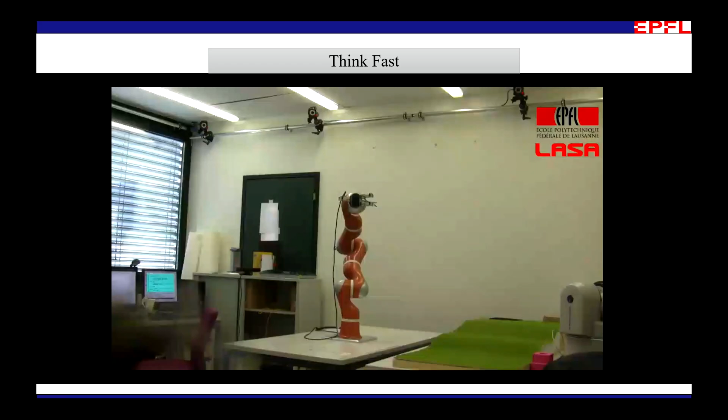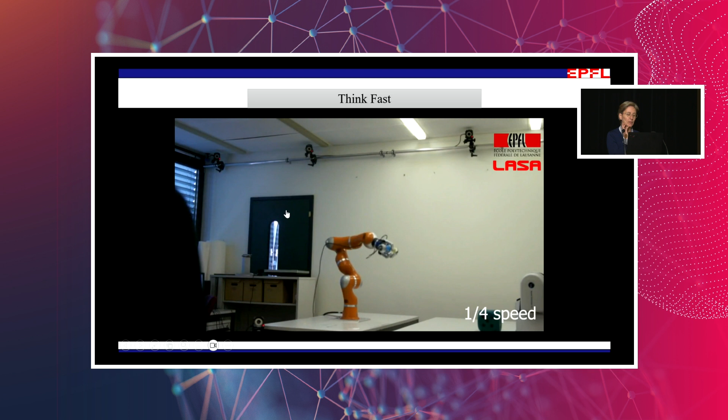I'll start first with the title of the talk. For quite some time, some of you may be aware of the work we did in my lab to demonstrate how robots can go beyond humans and move super quickly, computing things extremely rapidly, such as being able to catch objects flying. This required machine learning, because when you want to catch an object like this one, which is half filled with liquid, it's extremely difficult to predict how the liquid will move when you're throwing the bottle through the air. There is no exact mathematical model for this.

So this is how we bridge machine learning with control, observing that when you have an object flying with a highly nonlinear trajectory, you need to estimate the object's flight, and data-driven methods are ideal for this. But when it comes to actually catching the object, you cannot just go with machine learning. You need guarantees that you will converge to the point and that you will be stable, meaning asymptotically you will get there. And you need to do that extremely rapidly.

So it cannot be done with tons of data, or with a very large model. Preferably, you want something analytical or closed form, so you can compute it in real time in milliseconds. This is a combination between machine learning for modeling the highly nonlinear dynamics and control methods for convergence and stability, which allows you to react once you have convergence and stability. If you have inaccuracy in your prediction, you re-estimate it online, and then restabilize by placing the origin on the system.

Now I'd like to mention, and this is really meant for the junior researcher, that if you take just machine learning out of the box—support vector machine, neural networks, any support vector regression model—it will not do the job. Why? Because those models will drift.

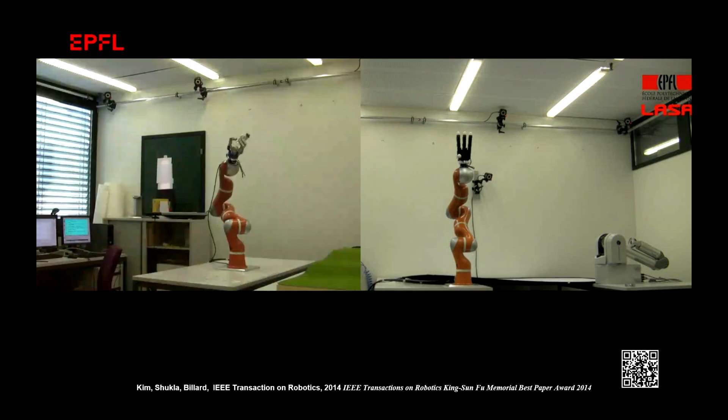And we showed multiple examples of how this could be done to catch a variety of systems with quite good accuracy. We also show that you can couple those dynamical systems easily, in such a way that you can have two robotic arms jointly reaching for an object, which is very difficult to predict. That's another example that we picked.

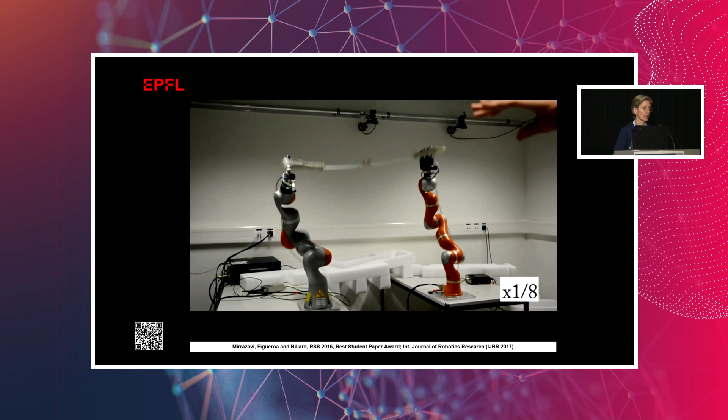When you throw a flexible bar like this, again, you cannot have an explicit model of how the bar is going to fly. So what matters is that you ensure your system can adapt to the flying motion.

We also looked at multi-attractor systems, so not just converging at one attractor point, but being able to move around an attracting point. And we started with the observation that if you wanted to have two dynamical systems with two different attractors, then you will have to partition the space.

And going back to machine learning, support vector machine is a nice way to partition space. If you are familiar with this, it's an automatic partitioning of the space into two classes. But this is also implicitly a way of learning a Lyapunov function, because by construction, your partition is defined by a function which is equal to zero.

On the left-hand side, the function is negative. So this is a Lyapunov function.

But the traditional support vector machine will not guarantee that your Lyapunov function vanishes at the point where you would like it to vanish. So this was a second contribution that we did at the time: to take the support vector machine framework, take the classical one where you make sure the points on both sides are classified, and then add other constraints that force the system to follow the dynamics and stabilize at the attractor, and eventually show that this was still a convex optimization that you could solve.

So another example of combining machine learning with theoretical guarantees.

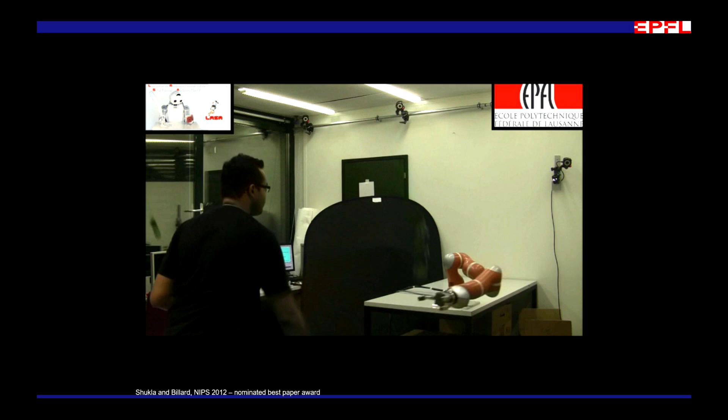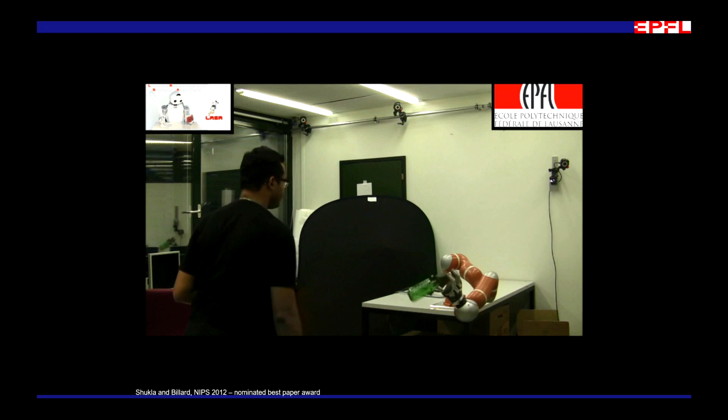And we showed an example of doing this for catching an object in flight, like this, where there are two attractors. They live in joint space. When you want to catch the bottle at the rim or at the neck, you have to close the joints in different locations. So those are two different attractors in joint space, and you can do that in milliseconds.

These were supervised learning problems with an exact partitioning of the space. I went super fast on this because I'd like to spend a little more time presenting another type of work that we've just done recently, which I'm fairly excited about. It's still relatively theoretical, but I hope you will allow me to discuss this for a second.

Machine learning is often used for supervised learning problems primarily these days, but I think we are overlooking unsupervised problems, and these form the majority of the problems that we really face today. In dynamical systems, there are tons of examples of unsupervised problems.

In fact, there are points in space that are really almost collocated, infinitely close to one another, but if you slightly move to the right-hand side, then you will converge to a different attractor. This is extremely important to detect those different variations, because this also means that if you want to characterize the stability of your system, you need to be able to know if you're following dynamic A or dynamic B.

The problem in unsupervised learning for dynamical systems is that usually you don't know the shape of the dynamics, nor the number of dynamics that exist, nor their attractors. So what we wanted to look at is how we can automatically learn and extract from data points how many dynamics there are, what shape, basically what are the functions of all those dynamics, and what are the attractors.

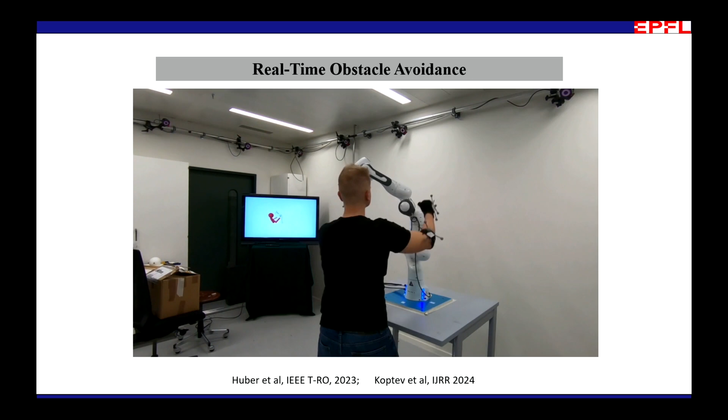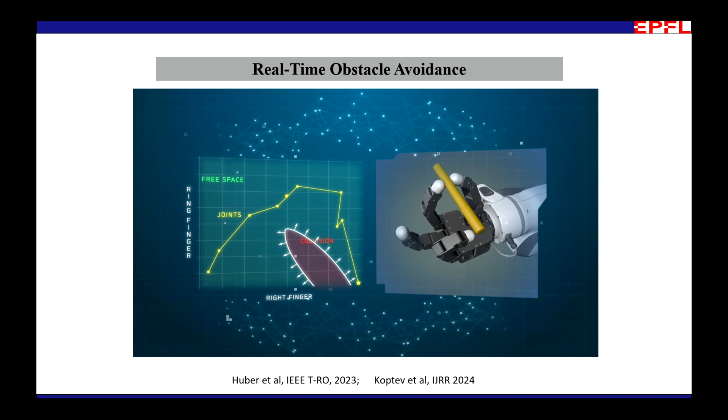Here is an example of this application for being able to grab and manipulate an object in hand and be able to not intersect the different fingers and the object.

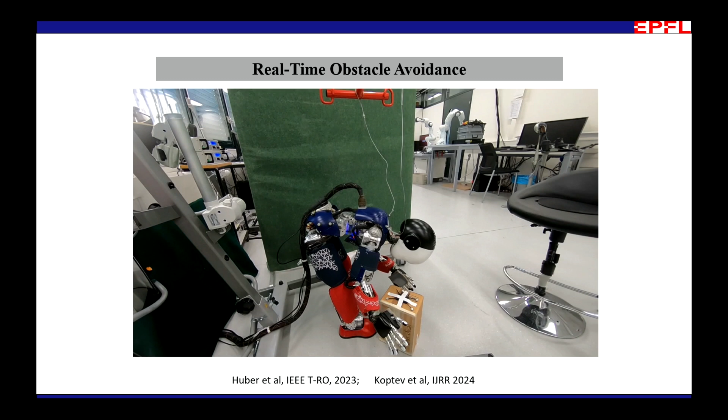We also ported that for a humanoid robot. When you control a humanoid robot that has to pick up an object like this, the robot intersects itself very frequently, so the robot is an obstacle for itself. But you can learn a model of the free space, which is the obstacle, typically here with neural networks or with support vector machines also. From this, you can control a dynamics which will allow you to avoid obstacles in high dimension.

I'll mention this work because I know that Mehdi Khoramshahi is here, and I was fortunate enough to have him in my group. He was doing his PhD and also as a postdoc. He worked on this application of the dynamical system for being able to model force control in dynamical systems.

So you can model typically a massage motion, which is a set of circular motions with a translation, as we've seen before, as a couple of dynamical systems, and then port this to control a robot. I'm just going to stop this for a second.

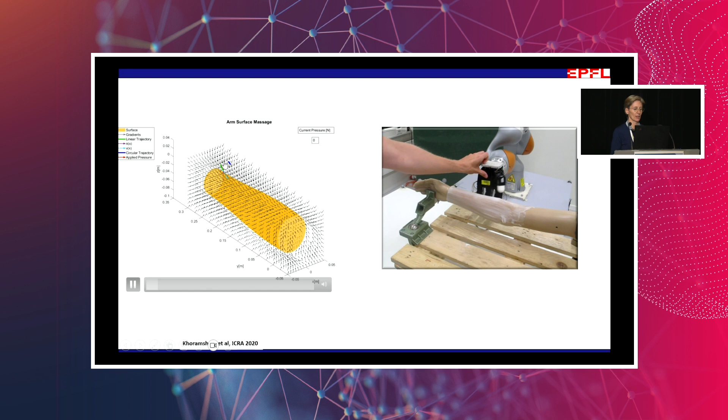So what does that give you? It gives you a set of dynamical systems that brings you to, for instance, a representation of the forearm, and on this forearm you can drive the system to go onto the arm and do a circular motion, and then also apply force by combining this as a magnitude amplification of the dynamical system along the normal trajectory.

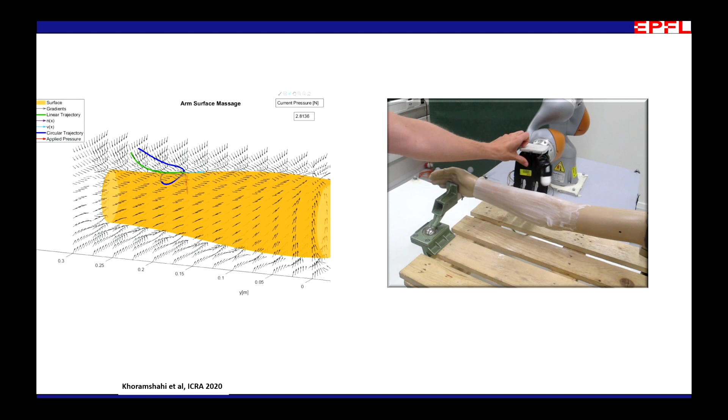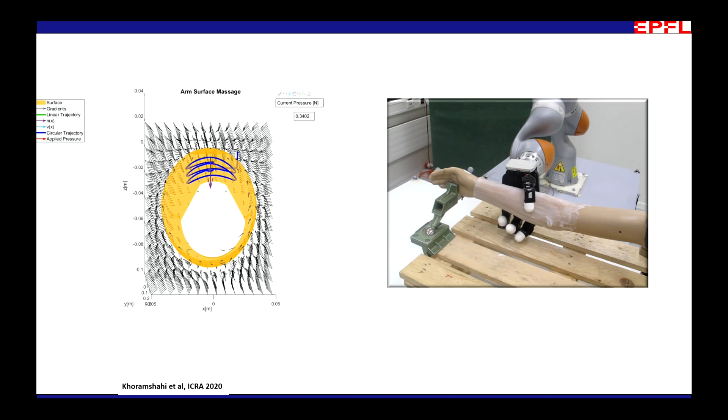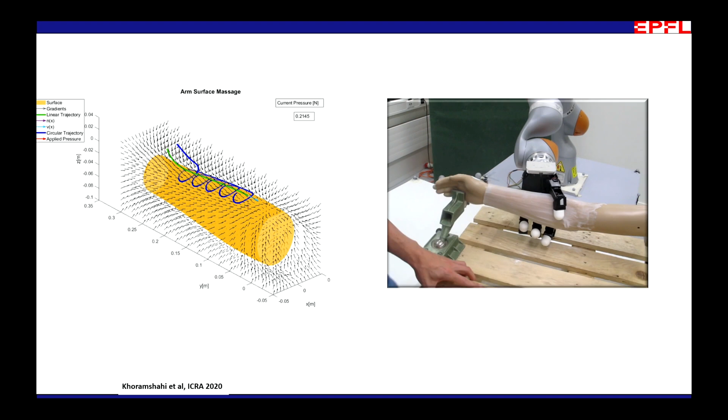It was a very nice project funded at the time by Samsung, and this was ported for controlling here a robot that was actually doing a small massage on the forearm of a mannequin. Because of the natural stability and adaptation of the dynamical system, you can also adapt this to different translations and rotations of the mannequin, which is tracked by a couple of sensors, giving you an ability to stabilize for this and to also adapt the motion and the force.

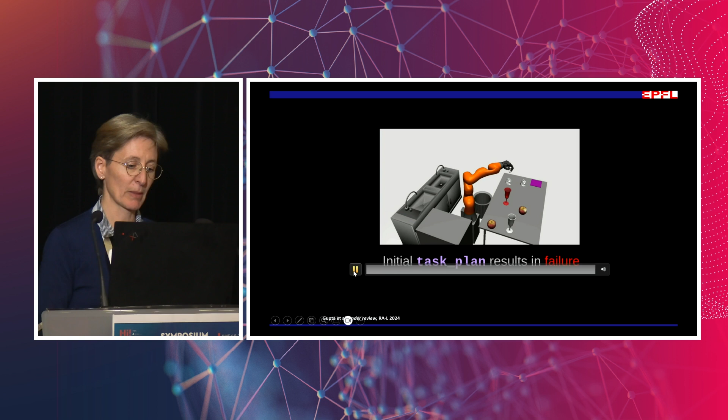More recently, we've been looking also at how to combine this with large language models. It's been mentioned previously that LLMs are doing wonders, obviously, but they also make mistakes. So we have used all the battery of dynamical system control with LLMs. The LLM will give you a planning, and what we do is combine this with the planner to be able to pick up a variety of objects.

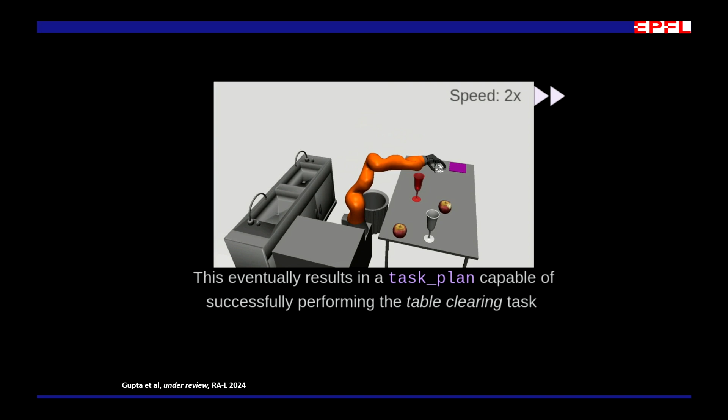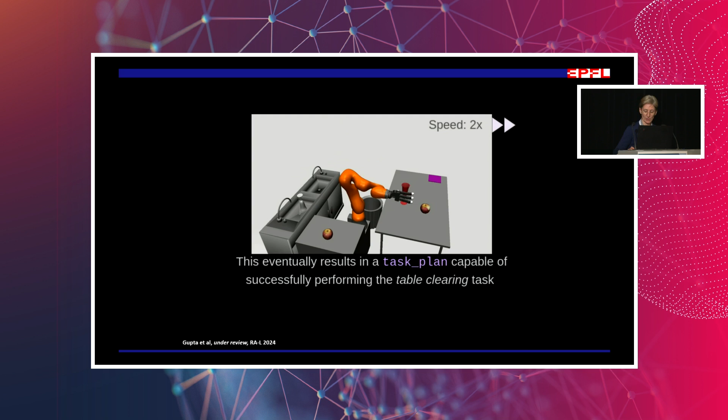The planner often gives you wrong answers. So one thing that we've looked at is how we can query and improve the solutions given by the planner, to ensure we have a better estimate of the properties of the dynamical system and be able to control for the grasp, the position, and the orientation.

And we've ported that to be able to control a robot live. Here it was to clean up a table and to be able to do that with a real scene, which I will just show in a second, doing it live with the robot being able to pick up a variety of objects and trash basically all the objects that need to be trashed, or clean up the table by putting those that shouldn't be trashed at the right place.

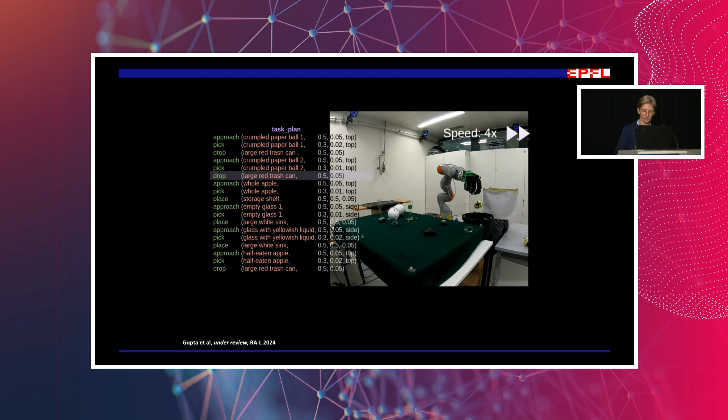I'm going to shift gears completely here because I would much prefer if we continue the discussion we had before. I think those discussions were more important than talking about technical details of our work.

More recently, we've been working on responsible robotics. Building on dynamical system control with obstacle avoidance, we deployed a robot, a wheelchair that can navigate in crowds, in the city of Lausanne. We showed it could safely avoid pedestrians even in highly crowded settings, like this marketplace during the day. We also tested it at night.

But the big question is, what if a collision arises? How can we prevent this, and how can we measure it? This led us to assessing risk. This is very different from what I presented before, but I wanted to say that roboticists don't ignore this. There are workshops regularly at ICRA, IROS, and RSS looking into assessing the risk robots pose to humans, and often those risks are underestimated.

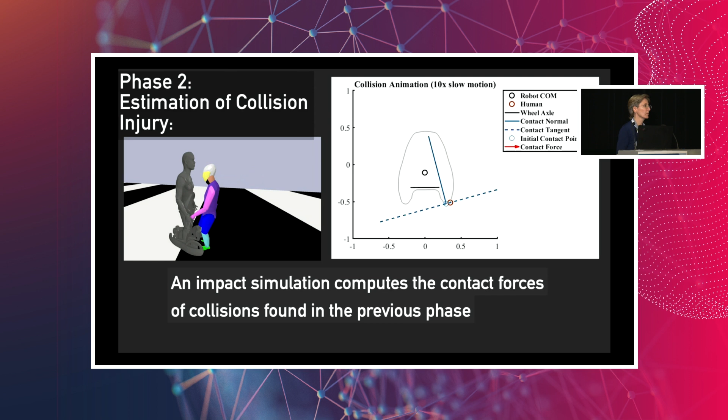You can do that easily in simulation, estimating the point of contact, the amount of force that will occur, and the directionality of the contact, which is so important.

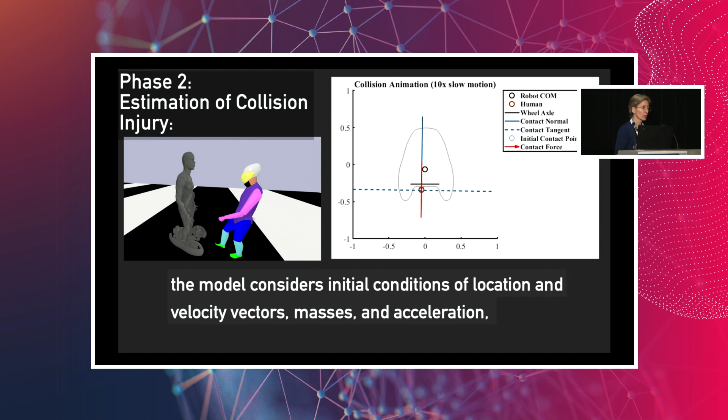But simulation is simulation, and it's often different from reality because the human body is very complex and difficult to represent well.

So we went to a crash test facility near Lausanne and conducted crash tests using standard mannequins. This is one of the mannequins here.

We used two mannequins, because with a wheelchair there are risks for both the pedestrians and bystanders, and also for the person in the wheelchair. These are standard mannequins used in automobile crash tests, and we can measure interaction force at various points across almost all the joints of both.

We conducted a systematic assessment of what happens when the robot hits the pedestrian, and we also did this with a child mannequin, which was much more complex because, as I mentioned, nobody really designs for this category.

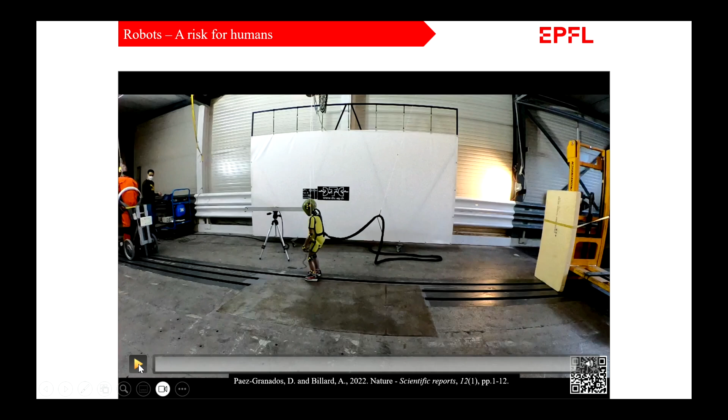We really had to search for a child mannequin, and when we finally found one, it had no force-torque sensors on it, surprising as that may be. It took us a while to engineer and install enough force-torque sensors to measure what happened. We did systematic assessments of the effect of hitting it at different places. I know those videos aren't nice to watch, but luckily, at this stage, they involve only mannequins.

To assess the effect of hitting the head versus hitting the chest, we systematically assessed also what happens when you apply different speed regulations. Speed regulation varies across countries, really widely, as you can see, from 1 meter per second to 2 meters, depending on the region.

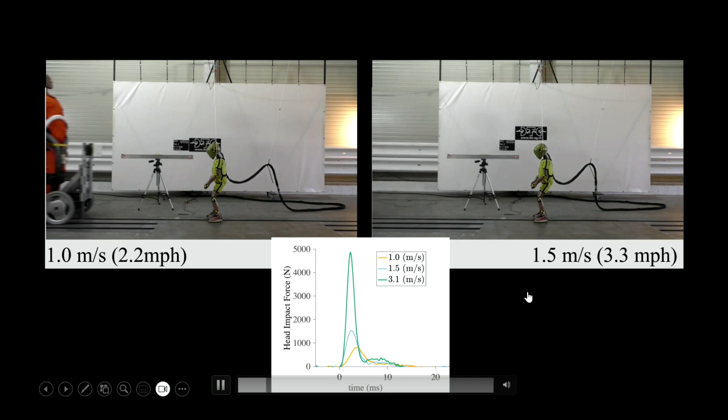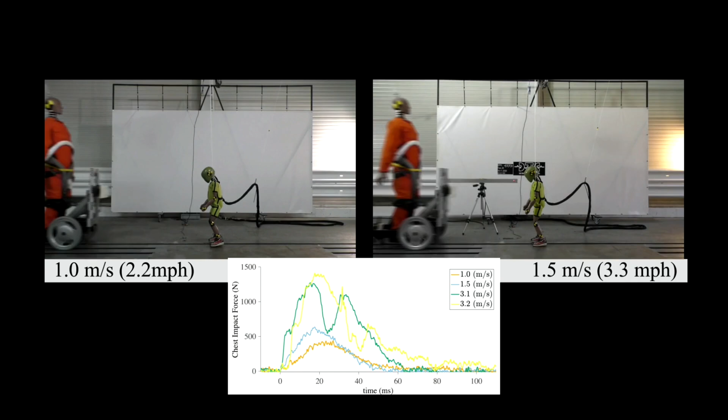These are sample videos contrasting hitting at the head or hitting at the chest with this different speed. We tested all speed limits, we did not go beyond them, but assumed we were driving at the speed limit while the child or adult was walking towards the object. That means you always exceed the speed limit, because you have two velocities opposite to each other, so they add up.

We then looked at, based on the force data we measured, whether we were exceeding the potential risk of injury according to existing standards. Sadly, yes, you do exceed that very rapidly. The probability of skull fracture and serious injury arises already at 1.5 meters per second for the child, and even for the adult it arises quite likely too.

But be careful here, this is not for adults like you and me. These are for adults who don't have good balance, who are elderly. When you hit an elderly person, the issue is usually that they fall, and this is what we're seeing with our mannequin. Our mannequin doesn't try to rebalance itself because it's not a robot, and this is what happens when you fall, you get secondary injury.

So you're still within speed limit, but the risks are high. These issues have to do also with the design of a robot, basically the mass, the inertia, because this isn't just about speed. We all know the speed limit is ridiculous, in fact it's about acceleration, it's about energy. But try to convince lawmakers that it's about energy.

I'm also, in my spare time, a member of parliament in Canton Vaud, and whenever I try to talk to them about watts or energy, I'm talking Chinese, right? I'm sorry, don't take it the wrong way, but they just don't get it.